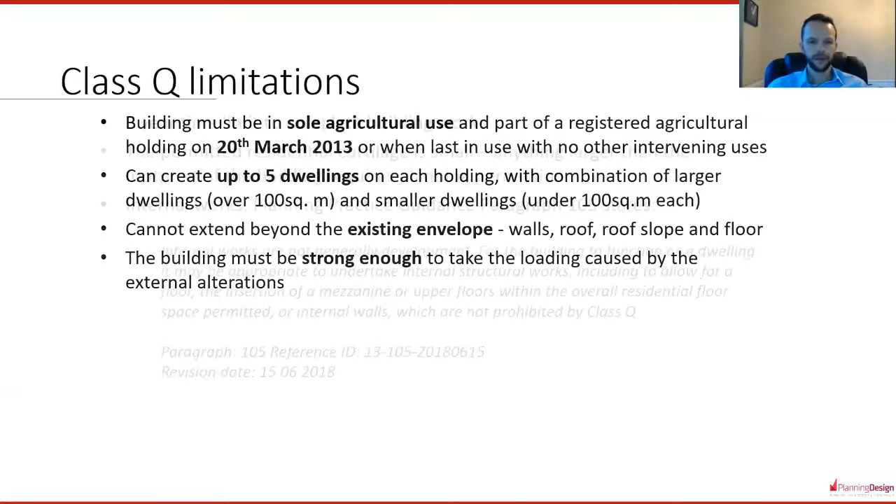You can create up to 5 dwellings on each agricultural holding, with a combination of larger dwellings, which are those over 100 square meters, and smaller dwellings, which are under 100 square meters. You cannot extend beyond the existing envelope of the building, so you cannot extend either the footprint of the building or any part of the walls or roof of the building. And the building must be strong enough to take the loading caused by the external alterations that are proposed as part of the conversion. A few further limitations.

There's a 3-year time limit to complete the building works, which of course is different to the normal time limit on a planning consent where it is 3 years to commence development. The permitted residential curtilage is small, therefore anything larger than the footprint of the building requires planning permission. But there is a stipulation on internal works. The planning practice guidance, which fleshes out the Class Q legislation, does state that internal works are not generally development.

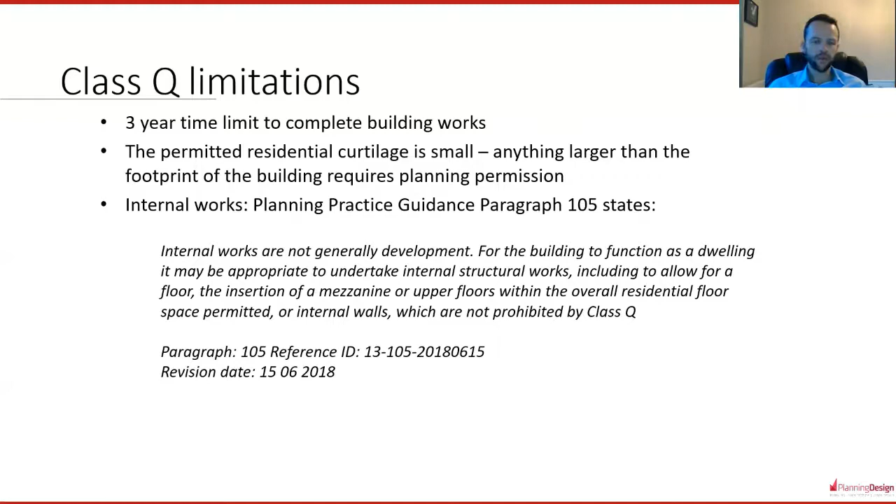And it goes on to state that a number of building operations are permissible, such as undertaking internal structural works, including to allow for a floor, the insertion of a mezzanine or upper floors within the overall residential floor space permitted, or internal walls. So they are all allowed within the scope of Class Q. Further limitations, you cannot use Class Q if other works were carried out using your Part 6 agricultural permitted development rights since 2013.

The Class Q rights do not apply to listed buildings or buildings within conservation areas, areas of outstanding natural beauty, World Heritage Sites, or in national parks. Another limitation is that any new agricultural buildings constructed with planning permission cannot be converted into dwellings under Class Q for at least 10 years. And a dwelling created under Class Q has no permitted development rights to alter or extend it. So in other words, any further alterations you would like to make to that dwelling would be subject to a further planning application.

There is a prior approval notification process which you have to go through, and that involves essentially making an application to your local authority, and they will assess a number of factors to make sure that they are happy that there wouldn't be any significant adverse impacts as a result of converting the building to a dwelling. And these include transport and highways impacts, noise impacts, contamination, flooding, whether the location or siting of the building makes it otherwise impractical or undesirable to be converted, and subcategory F is the design or external appearance of the building.

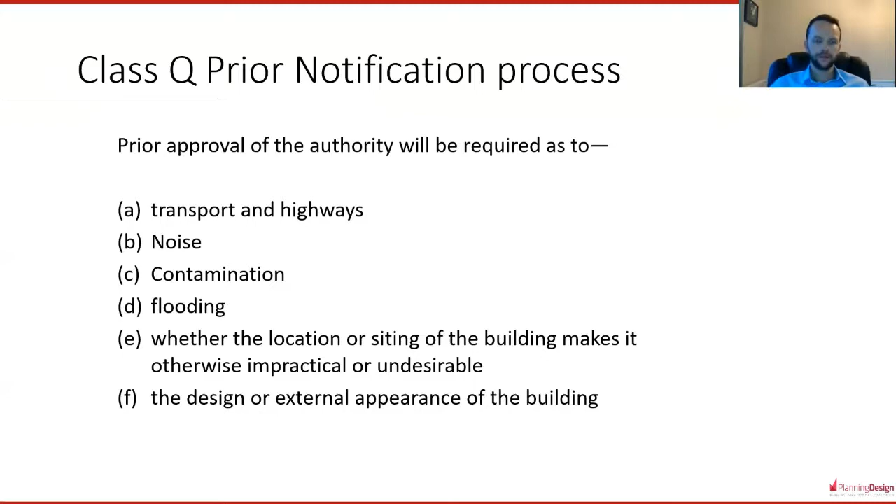So sustainability of location, just to touch on that a bit further. It has been clarified that the permitted development right does not apply a test in relation to sustainability of location. Instead, the local planning authority can consider whether the location and siting of the building would make it impractical or undesirable to change use to a house.

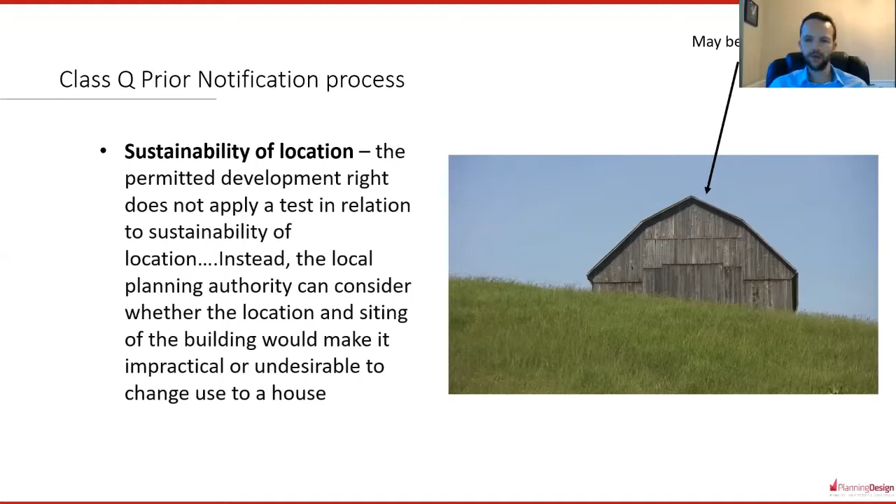And what this means really is that if a building is located, for example, at the top of a hill or a long way from the nearest road or services, then that might be a reason to refuse an application. But as I said before, there's no right to refuse something just because it is located remotely from the nearest town or village.

So three key issues have emerged, if you like, over the last five or six years since the permitted development right was introduced. One is that it must be deemed to be a conversion and not a rebuild. Another is that pre-application internal works to the building are possible. And thirdly, Class Q can provide a very useful fallback position. So I'll just talk through each of those in a bit more detail.

So firstly, it must be a conversion and not a rebuild. This issue really came to the fore in November 2016 when a High Court decision was issued, which really clarified that what you are doing to a building must reasonably be deemed to be a conversion, and not essentially a new building constructed within or around an existing barn.

And the case that's referred to there, the Hibbitt case, involved a 30-metre steel frame barn which was largely open on three sides. The local planning authority refused the conversion. The applicants went to appeal, but the planning inspector subsequently dismissed the appeal. Mr. and Mrs. Hibbitt, not willing to accept this decision, sought to quash the inspector's decision and took it all the way to the High Court. But they were unsuccessful with that, unfortunately for them.

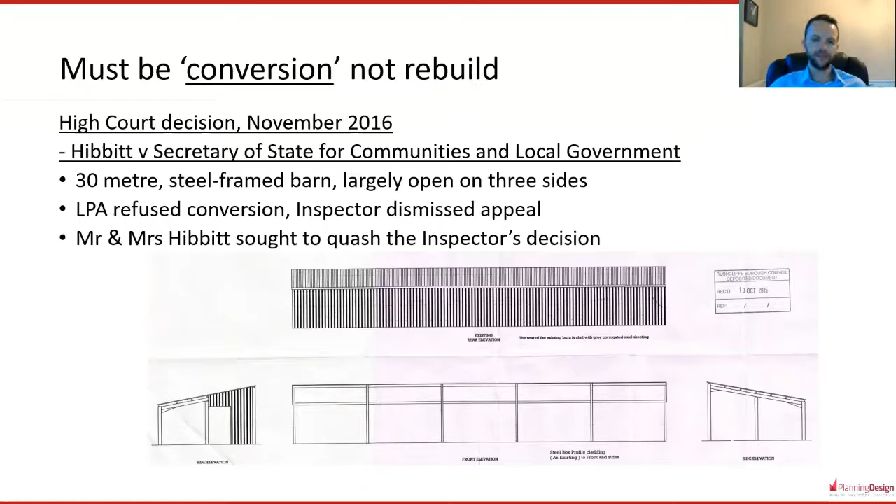And this decision essentially blew a lot of previous case law and appeal decisions out of the water, and it introduced this new threshold and new test that a building must be capable of conversion and capable of functioning as a dwelling prior to the application being made. And this really introduced a test in terms of what might be deemed to be a conversion.

So this distinction between what's a conversion and what is a rebuild or a fresh build is a very grey area. There's no clear line in the sand between what's a conversion and what's a fresh build. It is very much a matter of planning judgment. But what we do know is that much of the existing external fabric of the building must now be retained. And as a general rule of thumb, the building must be enclosed on at least three sides to be deemed capable of being converted to a dwelling under Class Q.

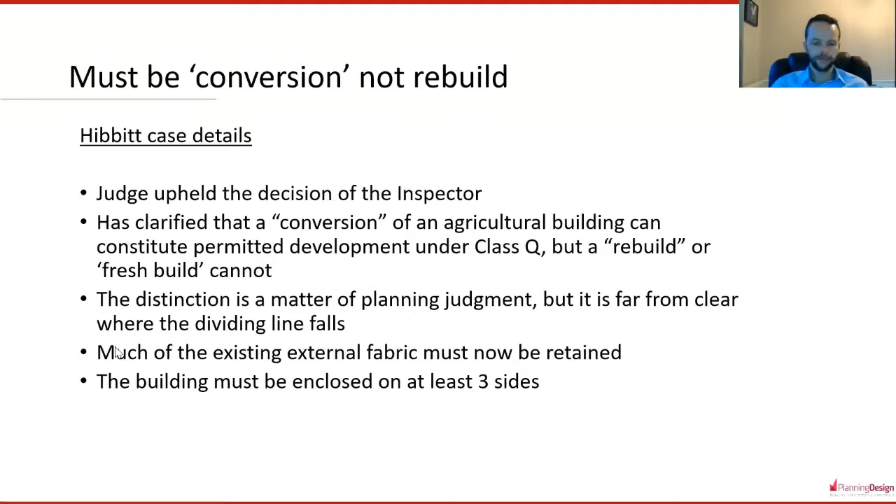Another interesting point to note is that pre-application internal works to the building are possible. This relates to Section 55 of the Town and Country Planning Act 1990, which states that the following operations or uses of land shall not be taken for the purposes of this Act to involve development of the land: the carrying out for the maintenance, improvement or other alteration of any building of works which affect only the interior of the building or do not materially affect the external appearance of the building.

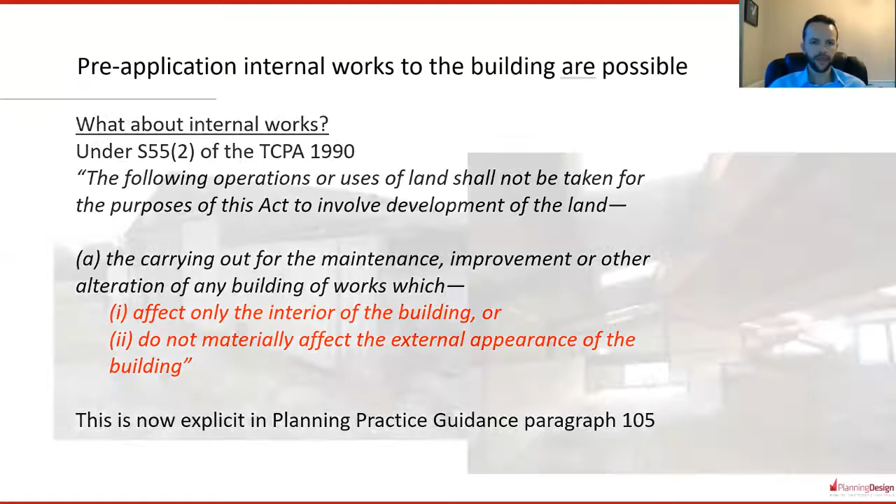So those elements highlighted in red are not taken to amount to development under the terms of the Act, and therefore planning permission is not required for those works. And as we've stated at the bottom there, this is now explicit in Planning Practice Guidance, paragraph 105. So pre-application internal works to the building are possible.

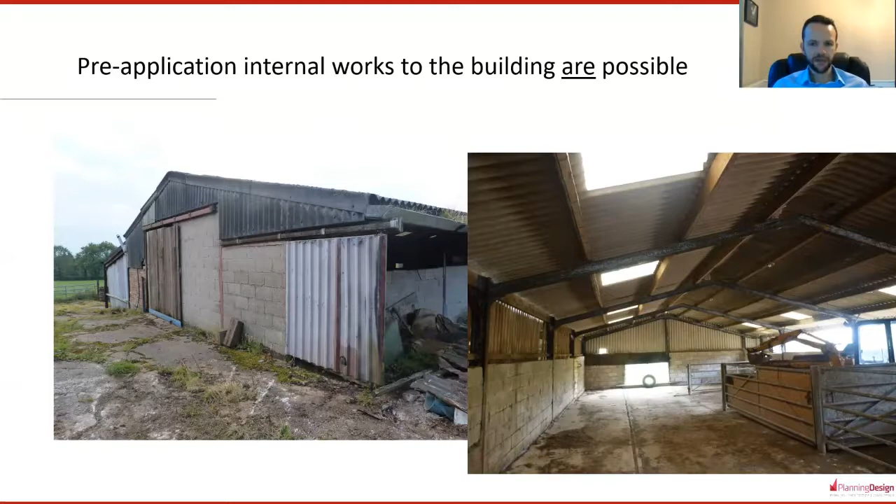And we have some direct experience of this, having handled a Class Q appeal in the Staffordshire Moorlands. We got a structural engineer to come and carry out a structural assessment of the building, and they advised that the existing steels were not sufficiently strong to support the external loading that would be required to convert the building to a dwelling. And there you can see a couple of pictures of the building as it stood when we first went and had a look at it.

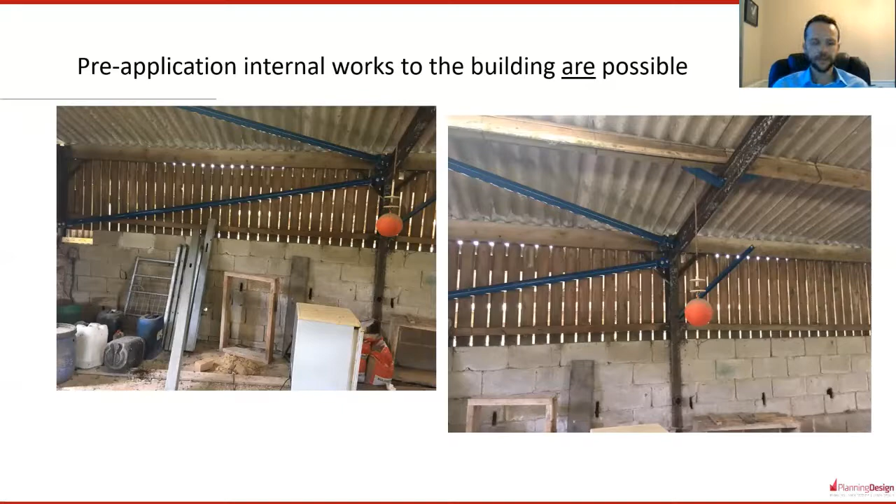The council weren't overly happy with this, and they refused the application. We went to appeal, and the appeal inspector agreed that they were not development and accepted them as part of the building to be converted. And we subsequently won that appeal, and Class Q consent was granted, and I think that building is now very close to completion.

The final point to note is that a Class Q consent can be used as a very useful fallback position. So one example we are aware of is where the conversion of a large barn to 3 dwellings and the replacement of an existing bungalow was permitted under Class Q, or a combination of Class Q and a planning application. A planning application was then submitted to demolish the barn and bungalows and erect 4 detached dwellings, and this was approved by the council, but was challenged by an aggrieved third party who felt that the council had given too much weight to the theoretical fallback position.

So this ended up at the Court of Appeal, and the judge deciding this case confirmed that the fallback position was a clear material planning consideration, and that provided the council had given clear and cogent reasoning for giving that fallback position significant weight, then they had not erred in law in doing that.

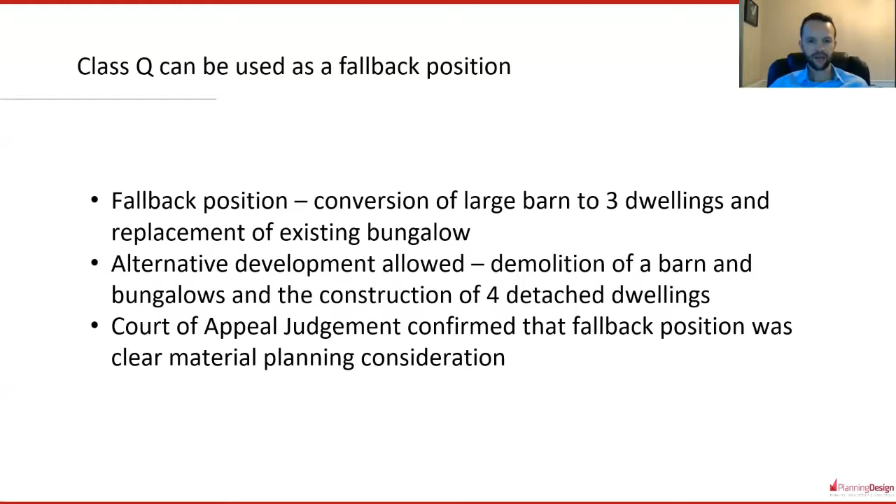And interestingly, some local planning authorities now actively encourage developers to consider an alternative new build scheme. And for example, the current guidance note on Class Q published by Cornwall Council says that in certain circumstances an application for an alternative form of development may well be preferable to the original Class Q consent, and may result in a better scheme in terms of design and amenity provision.

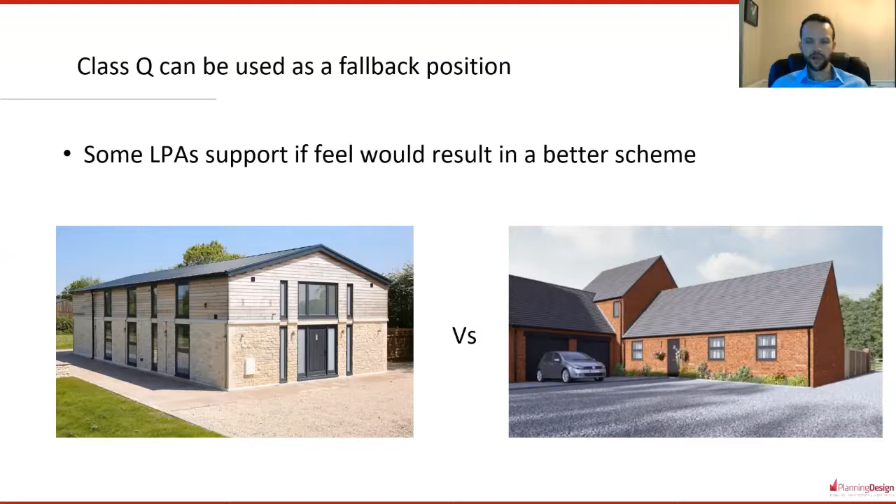Finally, just to touch on some additional planning applications which you might submit following the grant of a Class Q planning consent. It's sometimes desirable to follow a Class Q consent with full application in order to, for example, improve the external appearance of the building, to give it recladding, new walls or new roof. And following the decision in the Hibbitt case, this would now need planning permission rather than something which you could do as part of a Class Q application.

Another additional consent you might want to seek following the grant of Class Q would be to extend the residential curtilage, which under Class Q can only be as large as the footprint of the building. So in many cases that is a very restrictive residential curtilage, when you consider that you have to include any parking space and garden space, if that area is limited to the footprint of the building, then it's pretty small really. So that might be another reason to go back with a further application to extend it slightly.